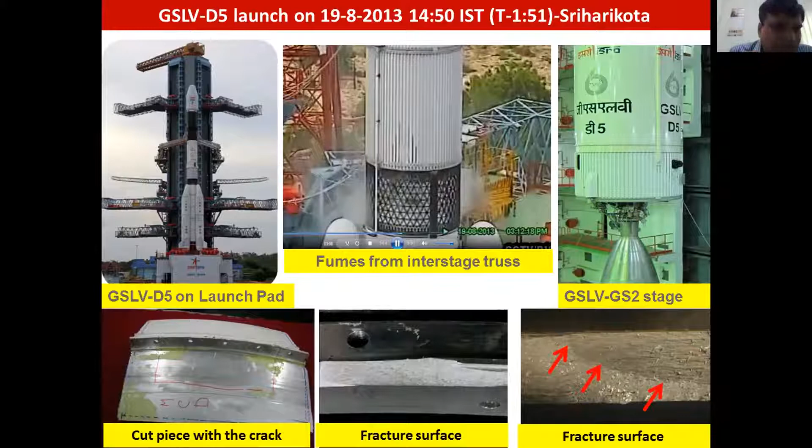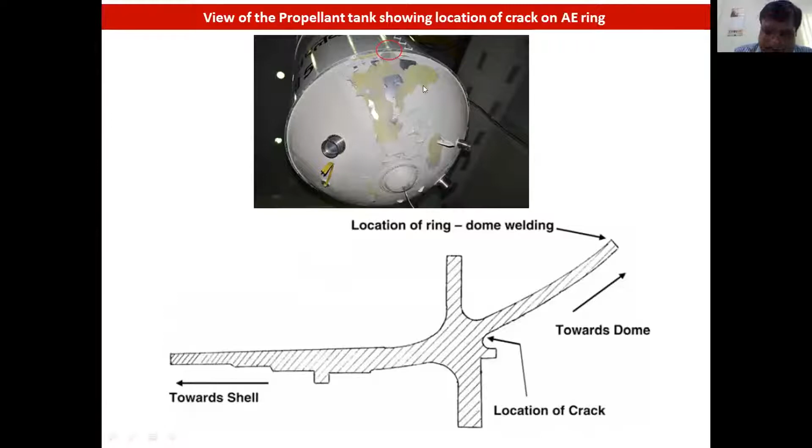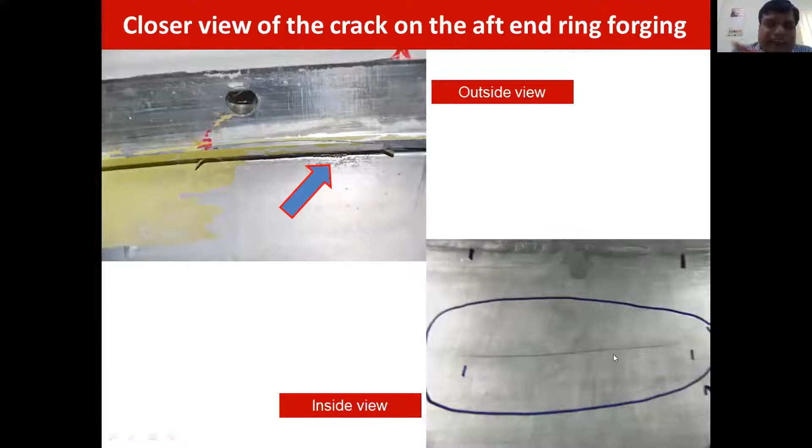So we brought the tank, and this is the configuration, and you can see the location of the crack. This is the D5 propellant tank that has been brought, and the location of the leak is indicated in red. We saw a 300 millimeter long crack on the aft end ring of the forging, and this is the location from where liters and liters of propellant were leaking, as you can see from that white smoke in the first photograph.

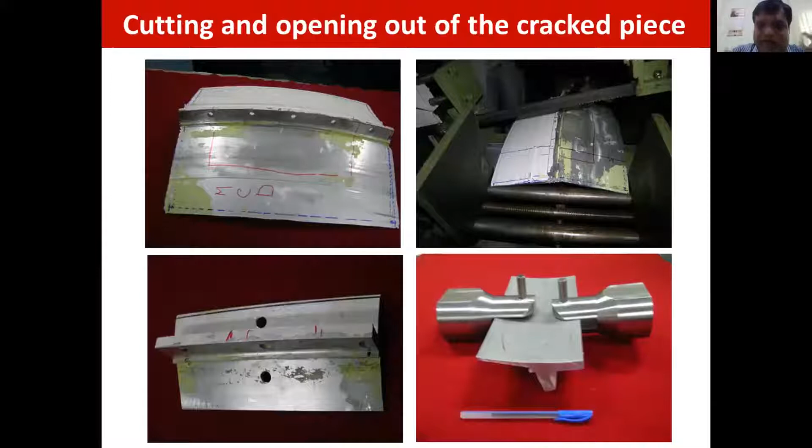Then we tried to evaluate and open the crack. The propellant tank is several meters long, so it has to be sectioned, and we have to carefully open it. So we put drill holes and opened it without touching it, and we successfully opened it in this UTM. And this is the area where it has shown the pre-existing crack. And we saw multiple features on the fracture surface.

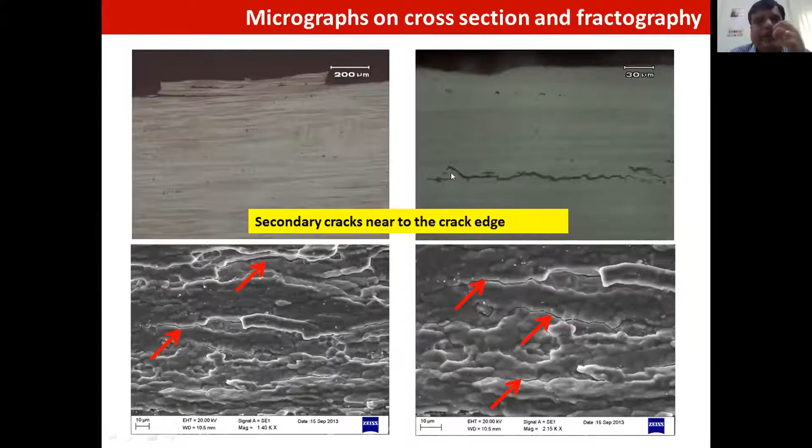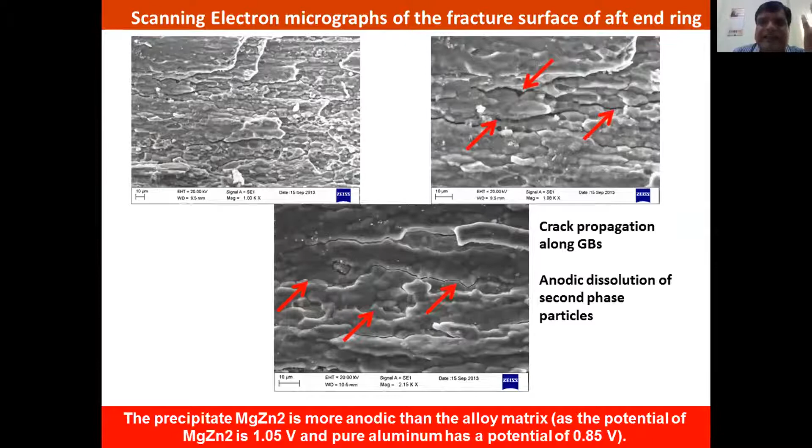You can see multiple secondary cracks near the fracture edge, and in the optical microstructure very near to the primary failure edge, you can see multiple cracks running along the main crack. And of course, we are seeing anodic dissolution of the precipitates, which indicates a stress corrosion cracking problem. We saw the microstructure, and we see extensive dendritic coring in the material,

because this is a very large size ring. Enough forging reduction could not be given from the cast ingot stage. So you have these flowery patterns in axial, tangential, and radial directions. These kinds of segregation patterns are not desirable in the material, and this being AFNOR 7020, that is an aluminum zinc magnesium alloy, it is prone to stress corrosion cracking.

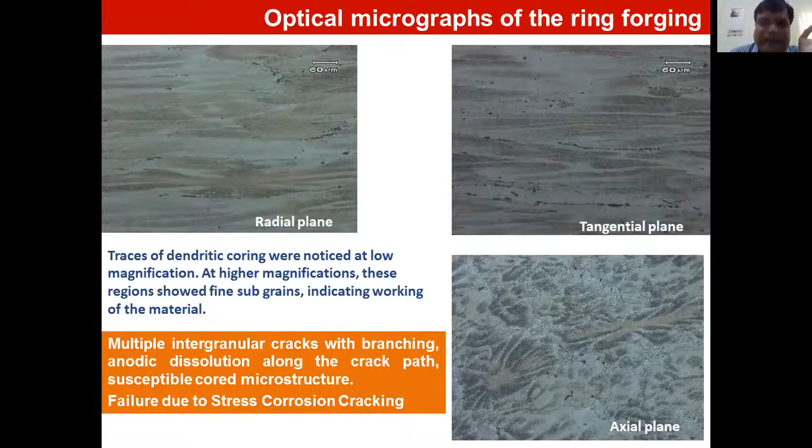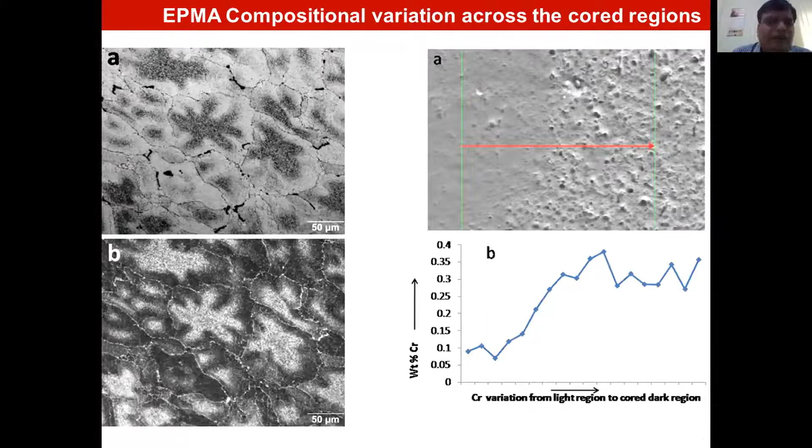But we have been using this material, and unfortunately it leaked on the launch pad. Subsequently, this material has been removed from our list of materials in use. We changed it to aluminum copper alloy AA2219, and we did extensive analysis on this particular hardware. There is a difference in chemical composition across these flowery patterns. As you can see, segregation of chromium is there,

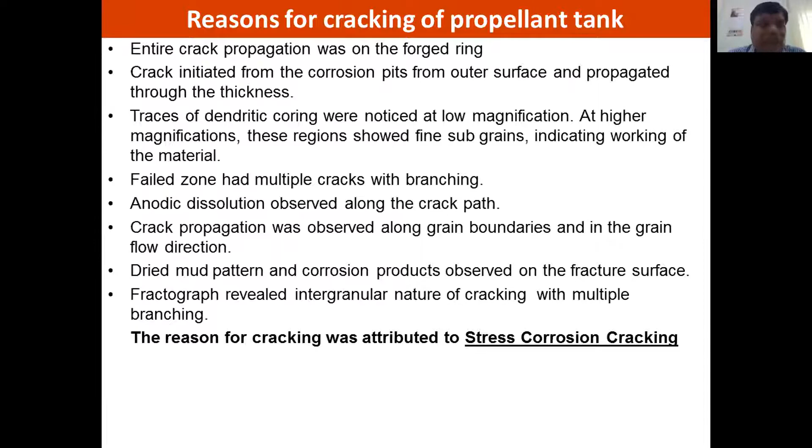and these optical microstructures show the cracks running parallel. We attributed the failure to stress corrosion cracking based on the fractographic observations, the microstructural observations, and the features seen on the failed component. Now, stress corrosion cracking comes without any warning signs. So that is most dangerous. It is brittle failure of a ductile material caused by the simultaneous action of tensile stress and a specific corrosive environment.

When you look at the stress corrosion cracking literature, you can note that tensile stress and a specific corrodent are most important. You should always have a tensile stress component. For example, aluminum alloys in a chloride environment, stainless steels in a chloride environment, brasses in an ammonia environment. So there is a list of combinations where the material and the medium are not compatible.

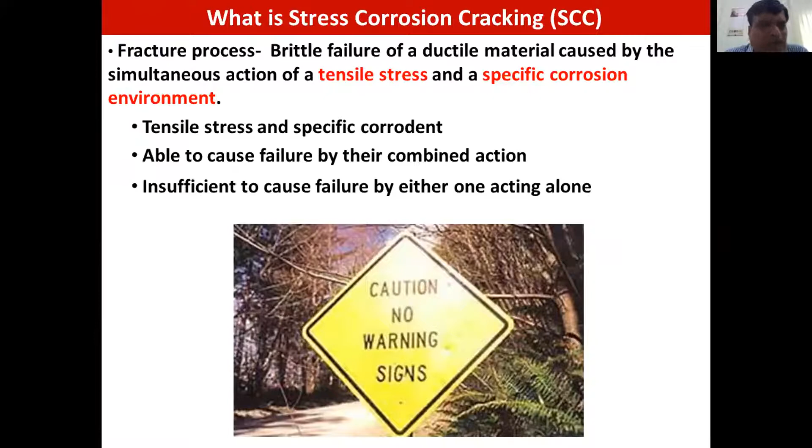So this is how the D5 launch was aborted, and subsequently we used an aluminum alloy 2219 propellant tank and flew it successfully, the same launch vehicle except for the propellant tank. And of course, this is know-how about stress corrosion cracking.

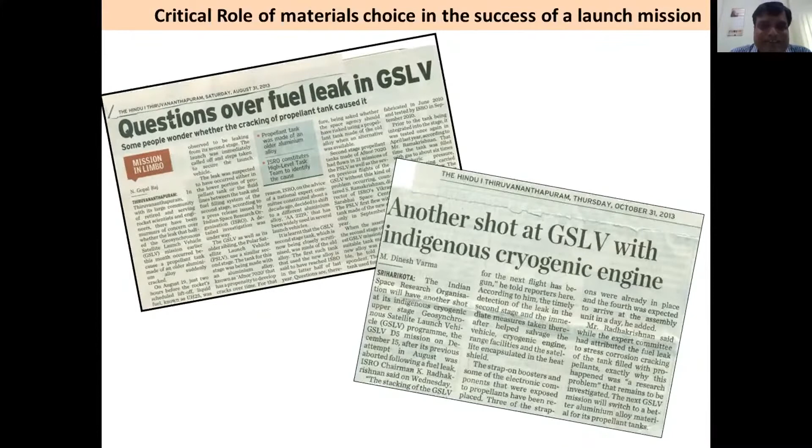Sometimes it can be so crucial that it can go into the press, and you can see questions over fuel leak in GSLV. These are the things that were discussed in August 2013: failure analysis committee, stress corrosion cracking, and as you can read in this news article, a different aluminum alloy 2219 has been used. With failure analysis going to The Hindu level, you can see what kind of anxiety it creates in the minds. So this is what I just thought I'd share with all of you.